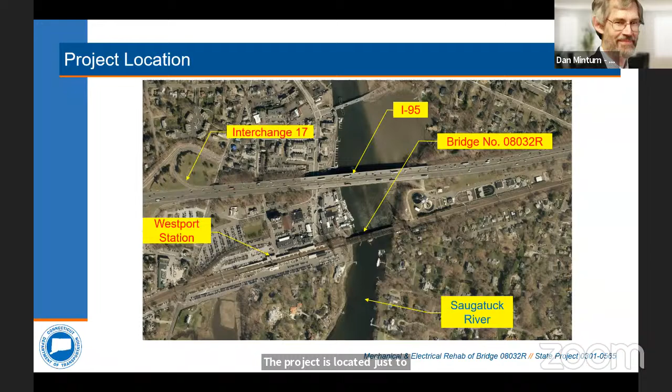The project is located just to the east of the Westport train station over the Saugatuck River. You can see just to the north is the I-95 bridge over the same river.

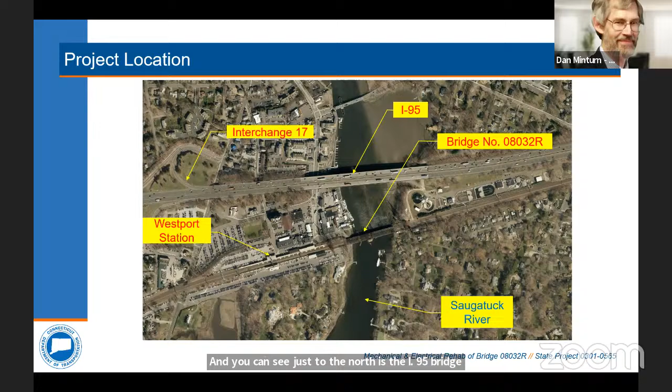This aerial view gives you a better perspective of the movable span over the navigational channel, which is where the work will be performed. The Westport train station can be seen in the background to the west, and you can see there are 4 tracks of Metro-North Railroad that go across this bridge to the station.

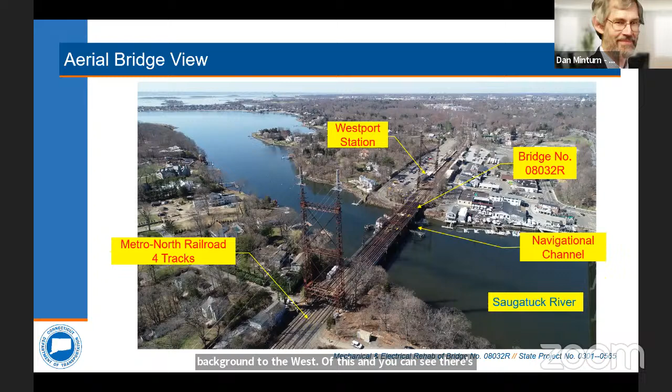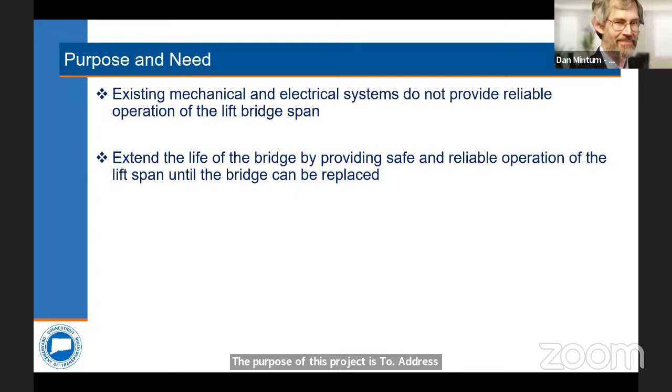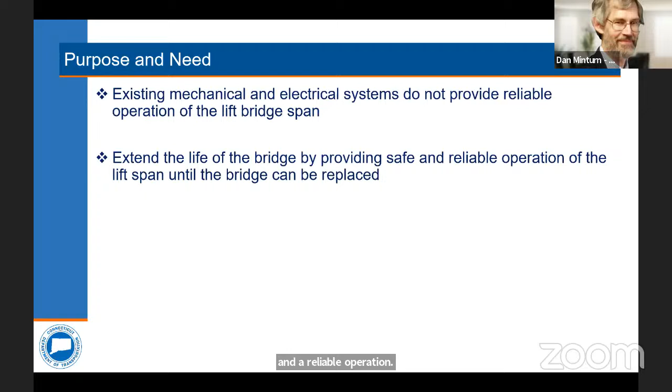The purpose of this project is to address the existing mechanical and electrical systems, which do not provide reliable operation of the lift bridge spans. This bridge has been there for 120 years, so it's already scheduled to be replaced. The intent is to extend the life of the bridge by doing the mechanical and electrical upgrades to provide safe and reliable operation of the lift spans until the bridge can be replaced.

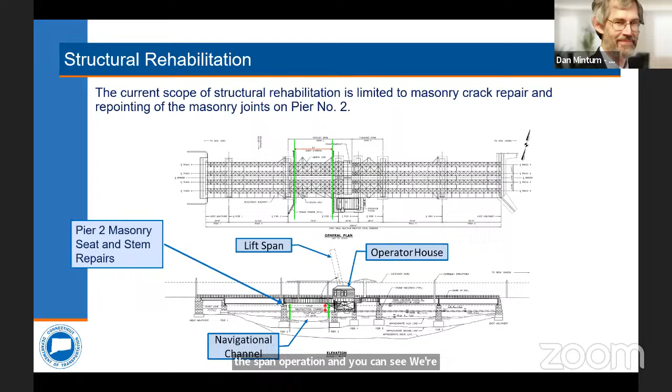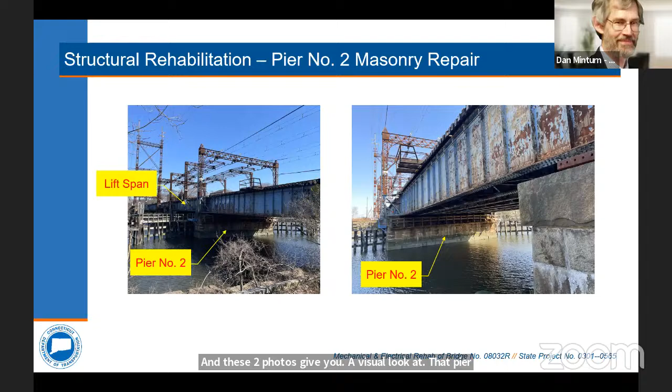The navigational channel, which is where the span is — could you go back one slide? I'm just going to point out the operator house, which controls the span operation, and you can see where we're pointing with the lift span. The dashed line shows the span in the open position. These two photos give you a visual look at pier 2 that we just talked about, on the west face of the pier, where the repointing will be done.

Now I'll turn it over to Nick Altebrando from STV, who will give you an overview of the planned mechanical and electrical rehab work.

Thanks, Dan, and good evening, everyone. As Dan said, we have a 120-year-old bridge here that is scheduled to be replaced. As part of the mandate that ConnDOT gave us working with Metro-North, we've made an assessment of the mechanical and electrical systems to see how we can improve the reliability and maintainability so the bridge can safely operate throughout the rest of its remaining life. Let's start with some of the mechanical rehabilitation. The majority of the equipment on the movable span that actually opens and closes it to marine traffic is original.

We have 120-year-old material for the majority of the equipment. We also have a very unusual feature at Saugatuck in that the bridge is driven from a diesel engine inside the control house. Based on our discussions and inspections of the system, we made the determination that we were going to replace the diesel engine with a small electric motor, which is now being used on all the other movable bridges that ConnDOT owns, so that operation and maintenance can be more regular. We're going to make a decision on what components we're going to replace, as well as what components we're going to refurbish and retain.

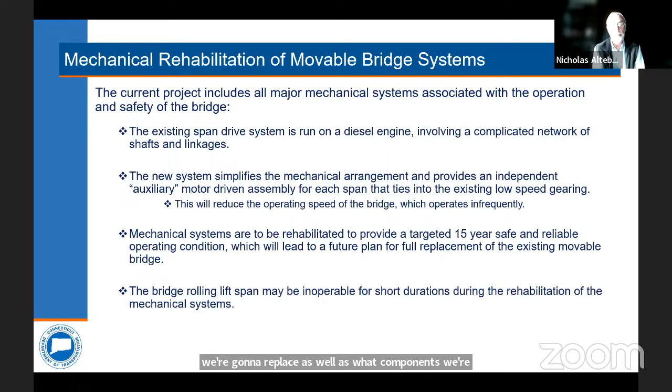On the next slide, you can see on the left-hand side the old diesel engine that we're going to leave in place but disconnect. In the center is a very unusual set of existing gearing and linkages that are going to be disconnected and removed, connecting the diesel engine to the movable span. They are so worn that replacement or rehabilitation in kind just wasn't feasible. So we're going to take that out and put the small electric motor on the span, shown in the photograph on the right, and connect a new electric motor with these old gears, which we've determined to be salvageable for the next 15 years of service until the new bridge is in place.

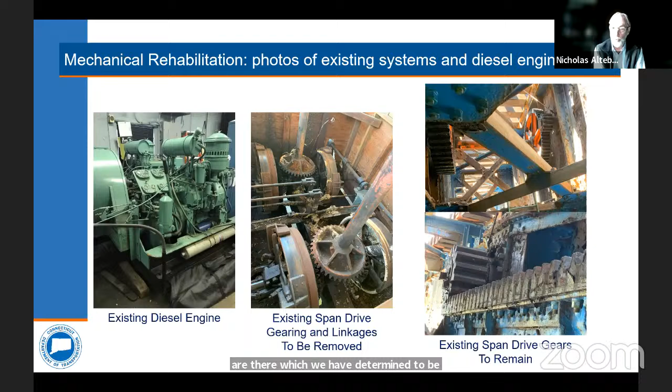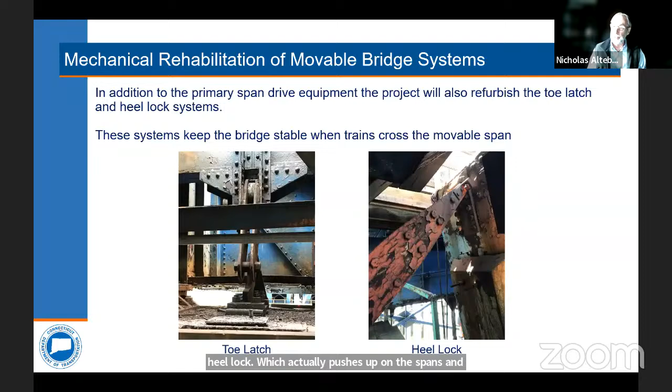On the next slide, there are two other critical systems on the movable bridge that we're also going to refurbish, and they're the ones that keep the bridge stable as trains go over it. On the left-hand side is what we call a toe latch, at the far front end of the span, which keeps the span down as the train goes onto the bridge. In the back, we have a heel lock, which pushes up on the span and keeps it stable as trains cross. Our determination was that we could keep those systems more or less with some minor refurbishing.

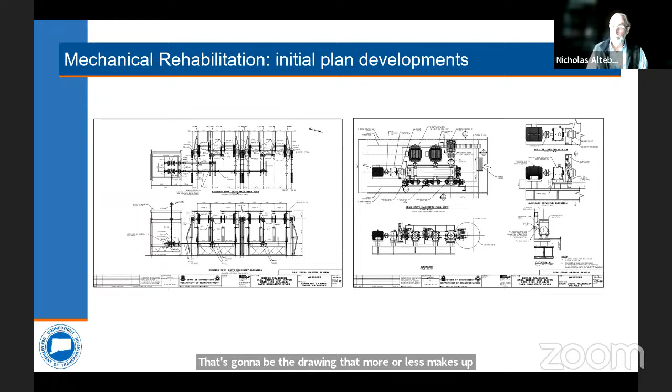For the electrical rehabilitation on the bridge, the systems that are on the bridge now are not new. Over time the original systems have been replaced, but even the material out there now is 20, 30, and in some cases 40 years old. Just like with computers at home or an old stereo, you can't find parts to replace electrical equipment that old. That's actually what's happened with this bridge—even with the best maintenance, we can't find parts anymore. The equipment is just obsolete. We made the determination that to make this bridge more reliable, we're going to replace the electrical system in total with a simple system that ties all the equipment—the span drive, the auxiliary drives—into one common point, making it easier and safer to maintain.

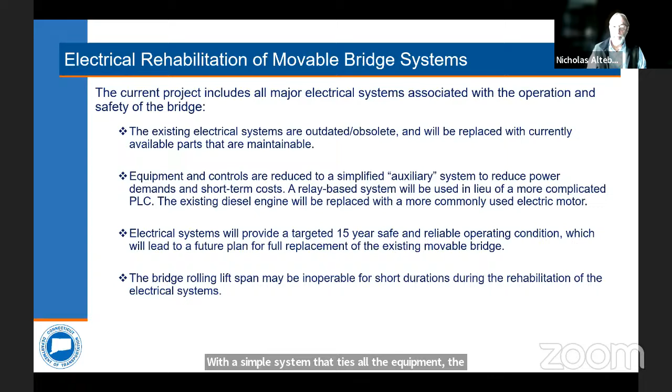Like with the mechanical drawing, on the next slide you'll see two drawings that represent how we depict electrical work for the contracting community. On the left-hand side is what we call a one-line wiring diagram. It may look complicated, but it's actually a simple drawing that electrical contractors use to determine what goes off the bridge and what goes on the bridge. On the right-hand side is the new control center, which ties all the control equipment into one location, making it safer and more efficient for the operator, and again more reliable and maintainable as we move forward.

With that, I'm going to turn things back over to Rick, who's going to discuss some of the permitting.

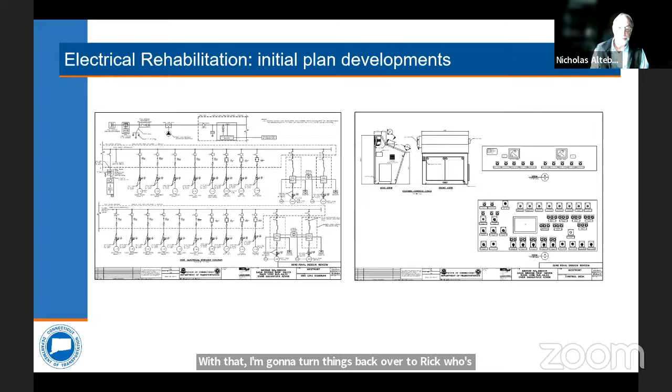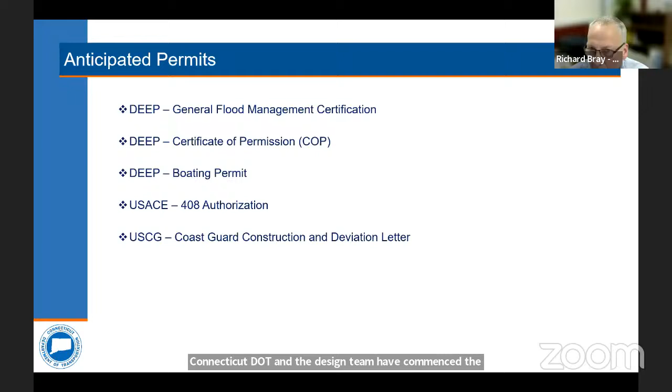The project site is within a FEMA 100-year floodplain, and the bridge is over a federal navigation channel. Interagency coordination is required, and Connecticut DOT and the design team have commenced the screening and coordination process with upcoming meetings with the Department of Energy and Environmental Protection, the U.S. Army Corps of Engineers, and the U.S. Coast Guard.

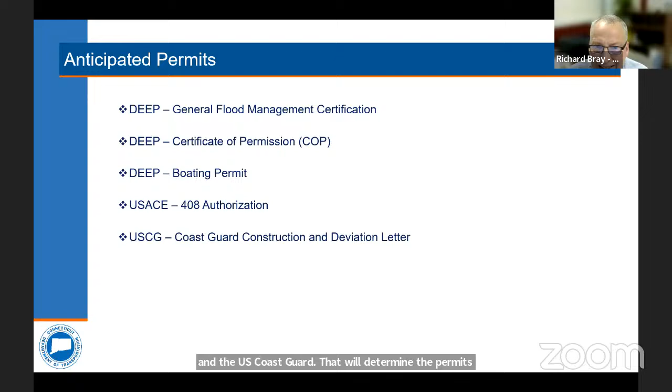That will determine the permits required for construction of this project. At this fairly early stage in the design process, about 30% complete, the anticipated permits include from the Department of Energy and Environmental Protection a general flood management certification related to the site being present within a floodplain.

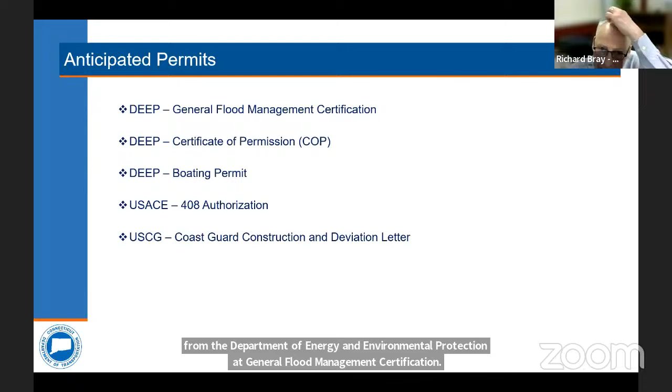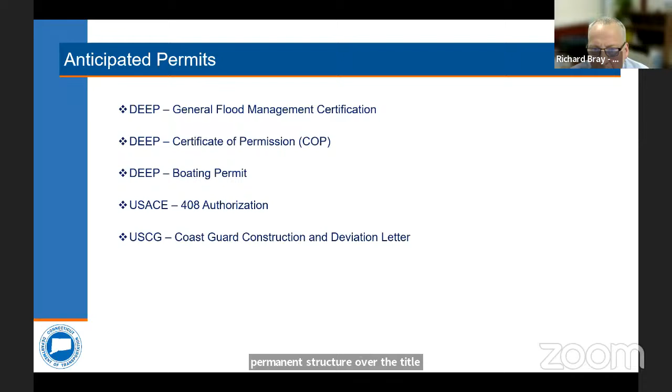From the Department of Energy and Environmental Protection, a certificate of permission reflecting the rehab of a permanent structure over the tidal watercourse. Also, a Department of Energy and Environmental Protection boating permit related to the potential use of a floating work platform for the Pier 2 masonry work that Dan had mentioned before, where the toe of the lift span comes to rest.

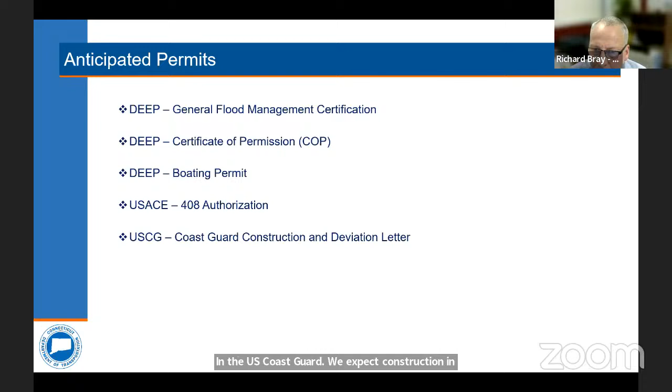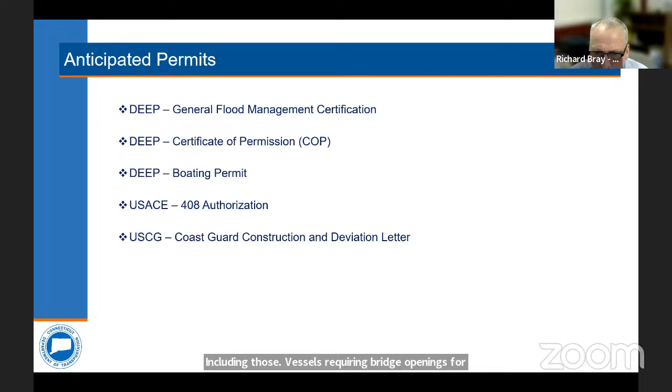We also have a U.S. Army Corps of Engineers Section 408 authorization expected, that's the federal part of accepting the modification of a bridge over a navigable channel. And from the U.S. Coast Guard, we expect construction and deviation letters addressing work affecting marine traffic in the vicinity of the bridge, including those vessels requiring bridge openings for passage, as the movable span will not be able to open for marine traffic for short durations during the mechanical equipment swap out and testing. The deviation letter will address advanced notifications with mariners and the harbor master.

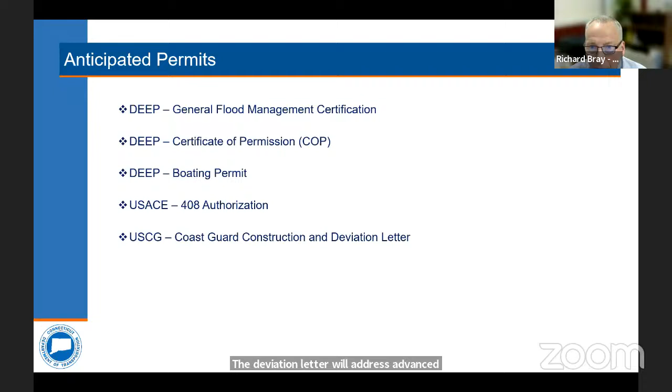I'd like to hit a little bit on the project schedule and the construction cost estimate. The design needs to be advanced from the current 30% level to 100% level. At about 90%, the permit applications will be sent to the agencies, and we need to have permit approvals before we can advertise the job. We expect the permit approval and design process will culminate probably in March 2025, plus or minus about a year.

From there, we have a procurement phase where the department will be advertising for a contractor to perform the specialized mechanical and electrical work. And the contractor will have to procure and fabricate some parts. So we do expect that the fall of 2025 is the commencement of construction that you would see in the field, continuing on for one season. We're hoping and expect that it would be spring into summer of 2026 that the work would be completed.

There's an estimated construction cost at this preliminary stage of design, at 30%, of $4 million expected, and the funding source is 100% state funds. The schedule presented and the cost estimates for advancing the project are all dependent upon the approval of permits and the availability of funds.